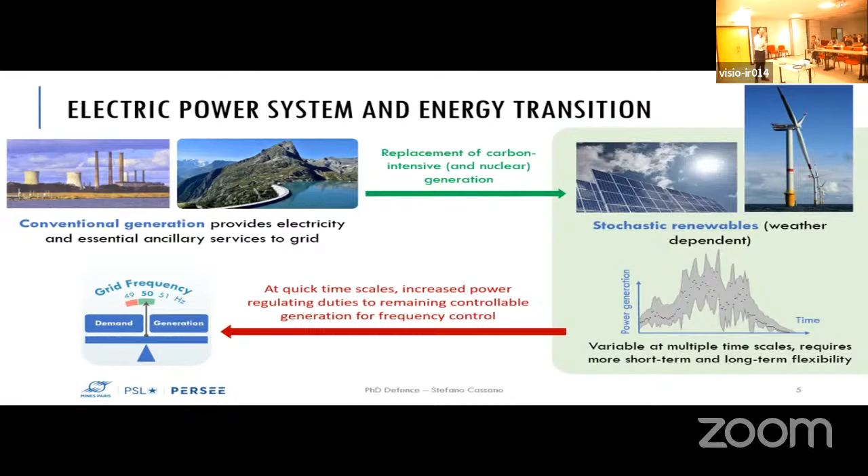Now, what is the role of hydropower in this context? Hydropower is a form of renewable conventional generation, the largest source of renewable electricity worldwide, and in many countries it represents critical infrastructure for electricity generation. Hydropower plants are dispatchable in the short term. They provide fast regulating power to the grid and fast startup times thanks to the lack of thermal constraints. In some configurations they can also implement energy storage, such as in the case of pump storage hydropower plants.

Given that hydropower, together with nuclear, will be the only form of conventional generation, future requirements of increased regulation duties, such as larger ramping rates, more frequent start and stop sequences, and enhanced frequency regulation, may lead to an increasing level of fatigue on mechanical components, and in the worst case scenarios, may lead to failures.

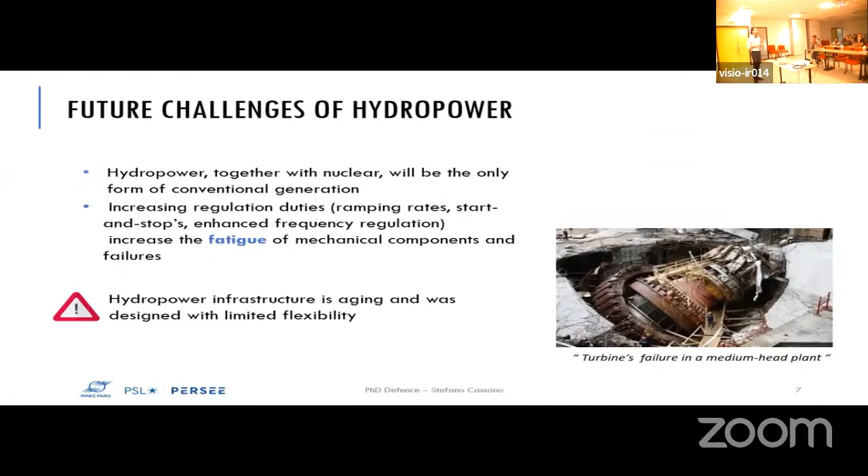Another problem is that since most of the plants were built between the 50s and the 80s, the hydropower plant infrastructure is aging and was designed with limited flexibility. So there's a need for a novel technical solution to assure reliable operation of these plants.

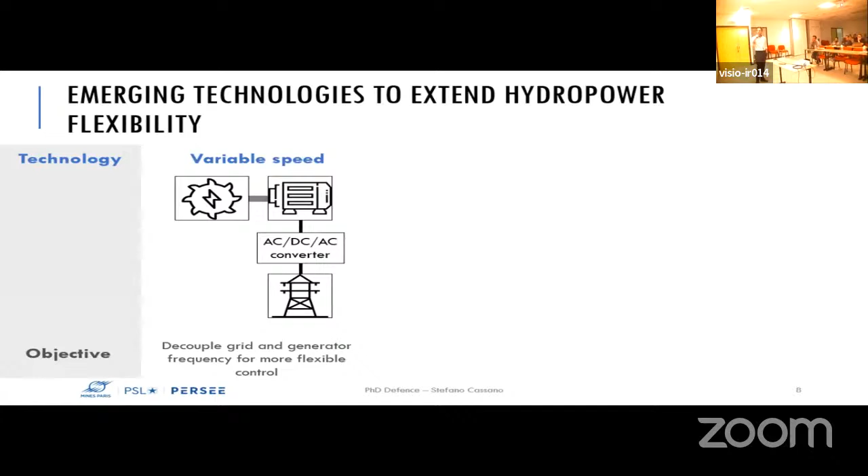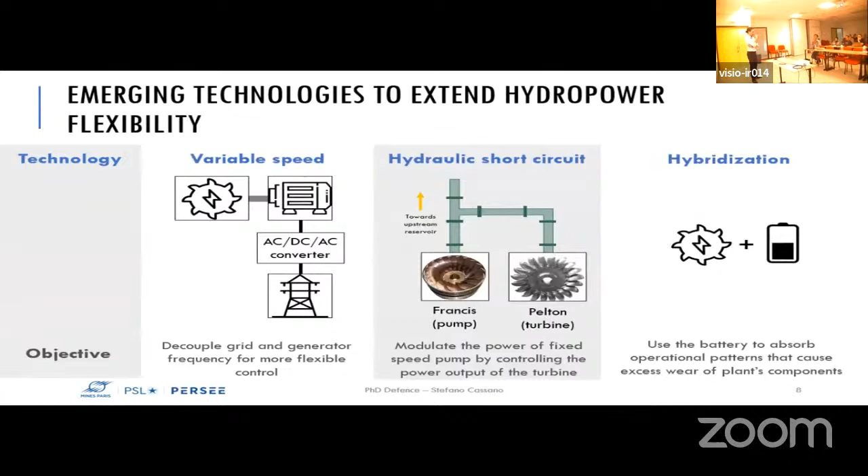In this slide, I'm going to show the most promising technologies to extend hydropower plant flexibility. The first is variable speed technology, which consists in decoupling the grid and generator frequency for more flexible control. Another technology is the hydraulic short circuit, a technique used in pump storage hydropower plants to modulate the power of the pump by acting on the output power of the turbine. And then we have hybridization, which is the technology we will tackle today.

Now let's move to the objective of this PhD thesis. We focus on hybrid hydropower plants. A hybrid hydropower plant is a conventional plant augmented with a battery energy storage system connected in parallel to the electric machine.

The advantages of hybridization are first to reduce the regulation duties for the hydropower plant because the battery is injecting the power, and second, to increase the regulation capability thanks to the quicker ramping rates of the battery. So the question we want to answer is, how do we control a hybrid plant?

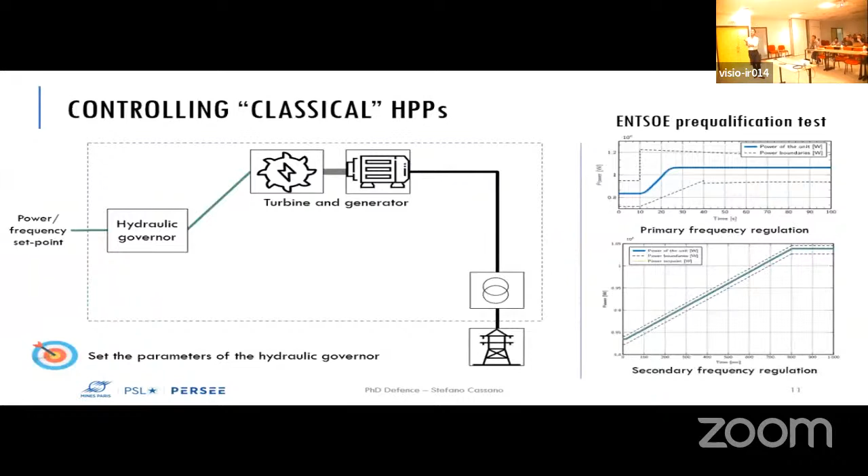This is a classical hydropower plant which is controlled with a hydraulic governor that takes as input a power or frequency set point, and it determines a guide vane opening to the turbine. In this configuration, we know how to deal with the control problem because what we have to do is to

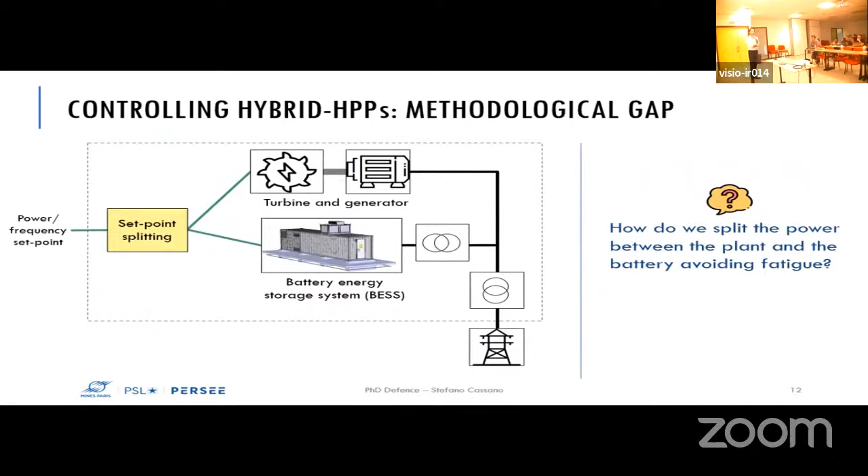set the parameters of the hydraulic governor in order to comply with the primary and secondary frequency regulation requirements. Then we hybridize, and we have two sources that are different in nature. So the question becomes, how do we split the power between the plant and the battery while avoiding fatigue? So this is what we call the set point splitting problem, a relatively new research problem that so far has been addressed in the literature with empirical models.

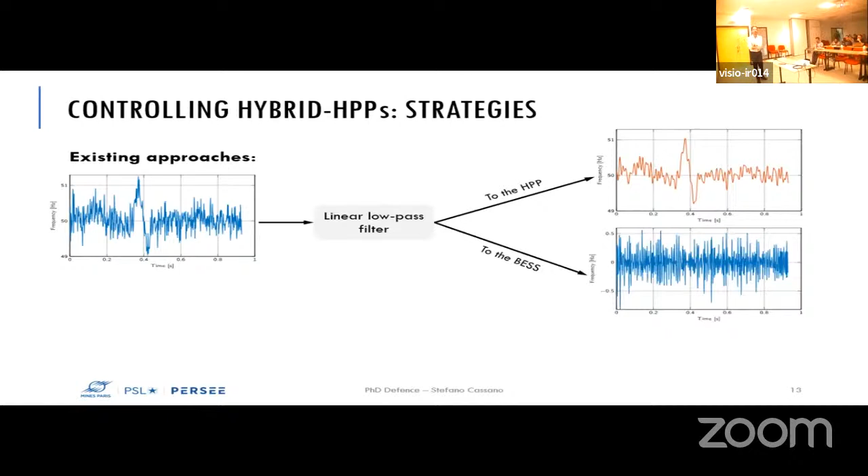One existing approach is to apply a linear low-pass filter to the input frequency and then to give the filtered signal to the hydropower plant and the higher variation of frequency to the battery. The advantage of doing that is that it's simple to implement. Linear low-pass filters are simple to implement. However, they are completely uninformed of fatigue issue, and therefore they can lead to suboptimal use of the battery.

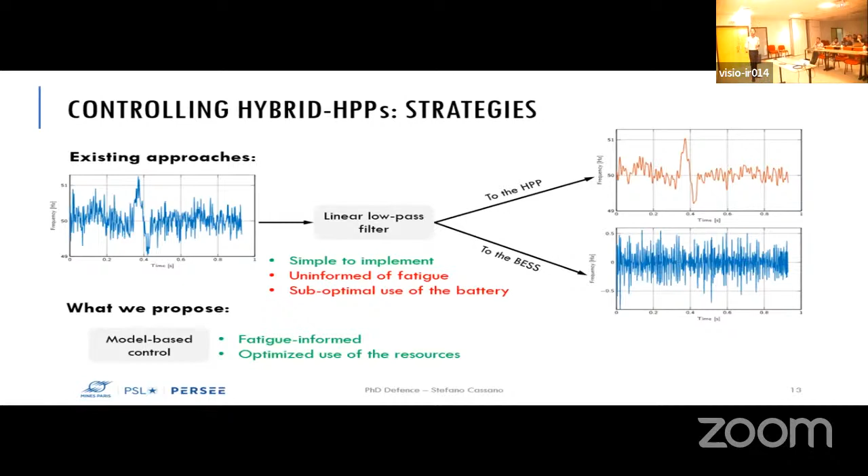As a major contribution of this work, what we propose instead is a model-based control that is fatigue-informed and allows optimal use of both the plant and the battery. Therefore, the primary objective of this thesis is to develop a set point splitting strategy with guaranteed performance on fatigue reduction. Then we have a battery, so we know that at a certain point we have to recharge it, and therefore the second objective is to design a scheduler for managing the battery energy.

Now let's enter the central part of the presentation about the real-time controller for fatigue reduction. So in this work, we focus on fatigue issues on penstocks in medium and high-head hydropower plants.

In particular, penstocks are pressurized conduits that deliver the water from an upstream reservoir to the turbine. The reason why we look at this particular component is because recent research has shown that the hydraulic transient due to enhanced primary and secondary frequency regulation can increase the damage on this component by 10 times compared to the case where no ancillary services are provided.

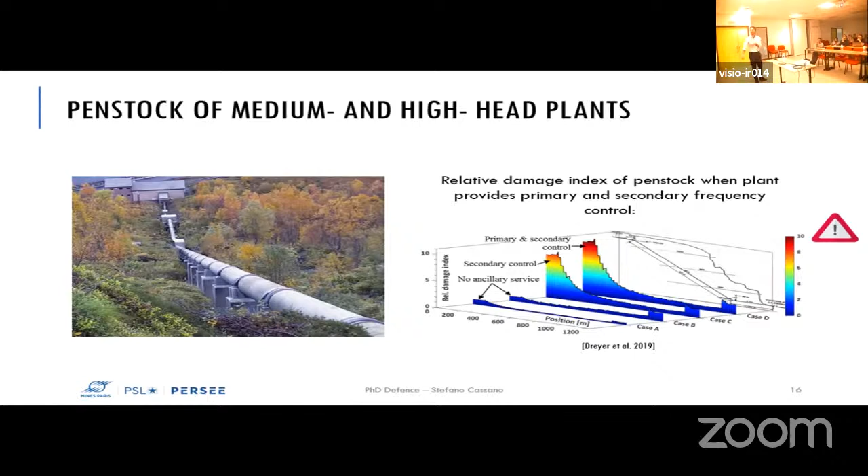So hydraulic transients due to regulation are well-known phenomena that I'm going to quickly explain with the following experiment we made. So we reproduce the penstock, which is connected to an upstream reservoir, and then we implement a valve representing the guide vane opening.

Before the valve, we install a relative pressure sensor to compute the head, which is given by the sum of two contributions. We have Z that represents the elevation head, which is the elevation above the datum, and then we have the pressure head, which is expressed by the pressure measured by the instrument divided by the water density and the acceleration of gravity.

Now, the experiment consists in fully closing the valve from a fully open condition. So let's see what happened with a short animation.

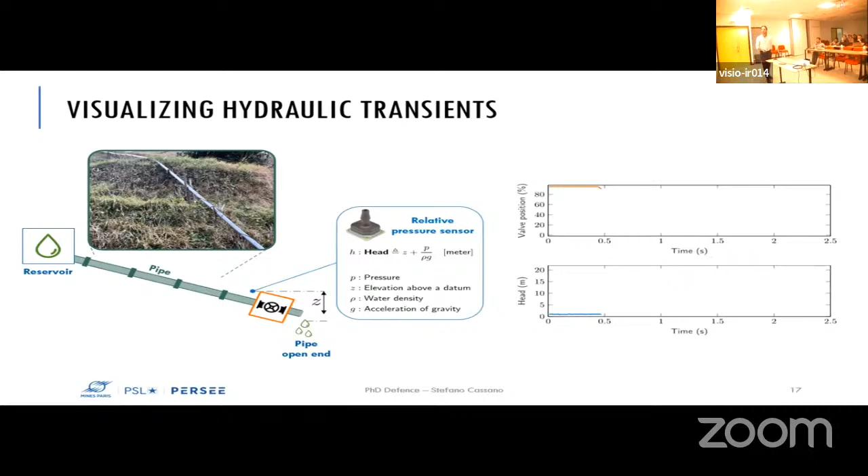So at the beginning, the valve is open and the head is close to the atmospheric pressure. Then we start closing the valve and the pressure rises up to a maximum value. Then the valve is closed and we observe a reflected wave that propagates through the penstock at the given time period, which is given by 2 times the pipe length over the wave speed.

This reflection dissipates due to friction until reaching a steady state condition where the head now is equal to the static pressure of the water column. This phenomenon is known as water hammer, and it appears for rapid variation of the guide vane opening.

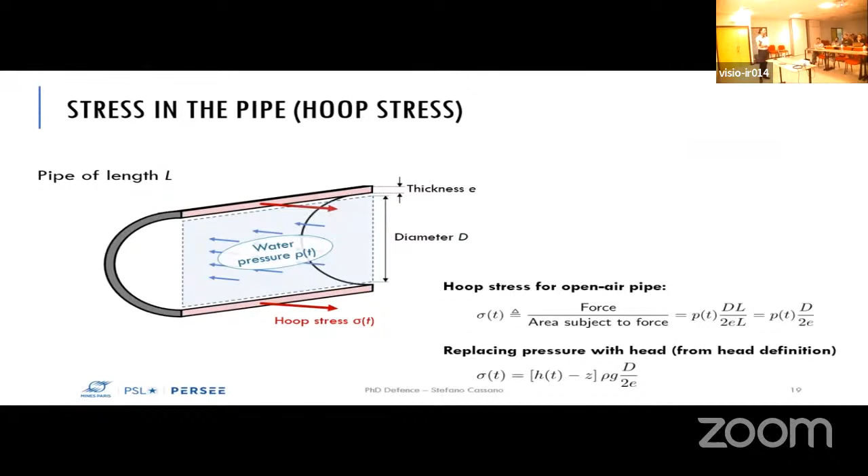Now, to go from the stress history to the service life of the component, let's consider the following stress signal, where we can identify the cycle amplitude delta sigma.

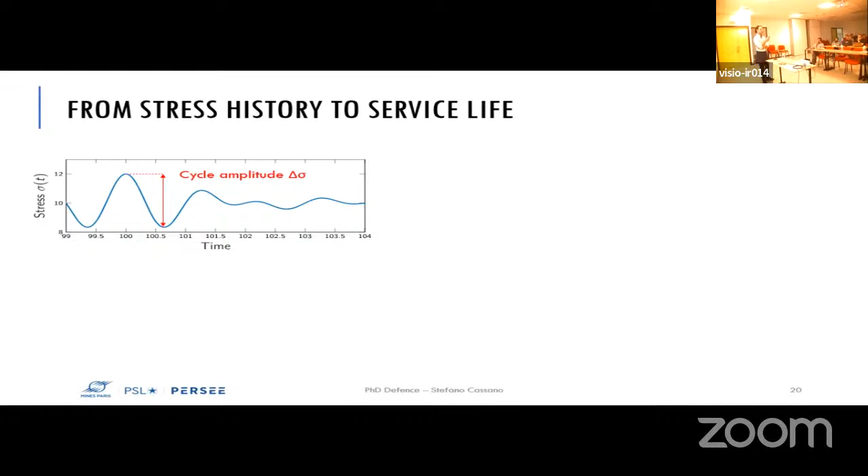A curious and interesting fact is that for ferrous material such as penstock, there exists a value called the fatigue limit, below which fatigue won't virtually impact the residual life of the component. So the intuition behind the formulation of a fatigue-informed controller was: can we design a controller that ensures the penstock stress stays below this fatigue limit?

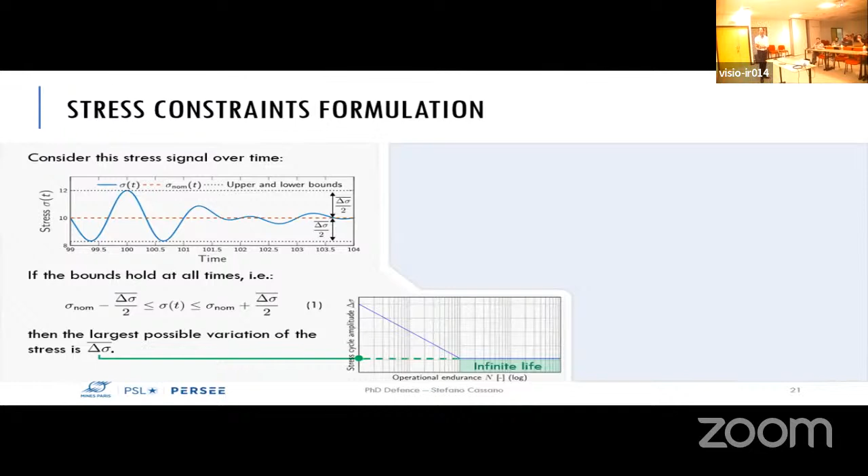To formulate the stress constraint, we consider again the stress signal over time, where we impose the following bounds. We obtain that the largest possible variation of the stress is given by delta sigma bar. If we set delta sigma bar equal to the fatigue limit of the SN curve, then we can possibly avoid fatigue.

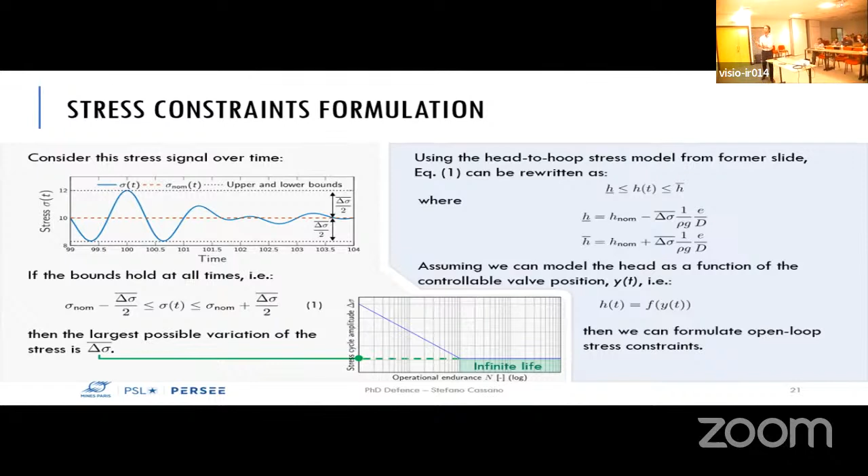Now, we can rewrite equation 1 using the head-to-hoop stress model from the former slide, and then we identify the upper and lower bounds in terms of head. Assuming that we can model the head as a function of the controllable valve position, we can formulate an open loop stress constraint. Therefore, the question is now, how do we model this head?

The behavior of the water within the pipe can be described by means of the conservation law of mass and momentum. Assuming a one-dimensional approach, this can be represented by the following set of partial differential equations that relate the state variables in terms of head and volumetric flow rate with the geometrical parameters of the pipe and some constants.

Now, the set of partial differential equations are converted into a set of ordinary differential equations by discretizing the pipe into a finite number of elements.

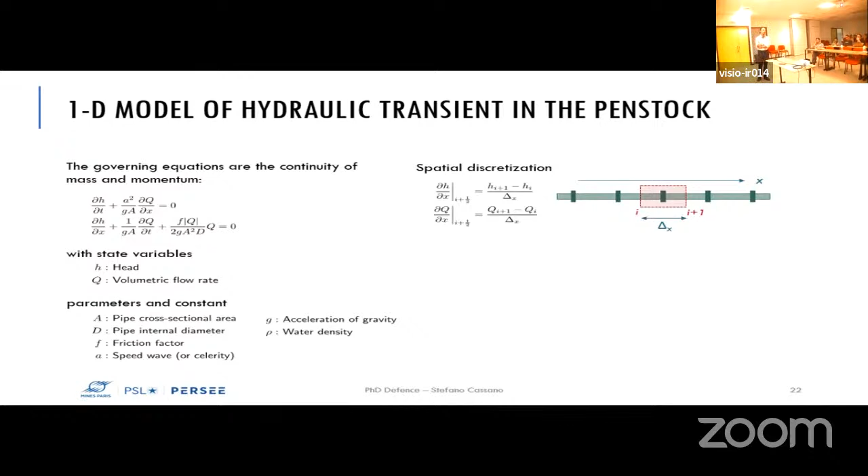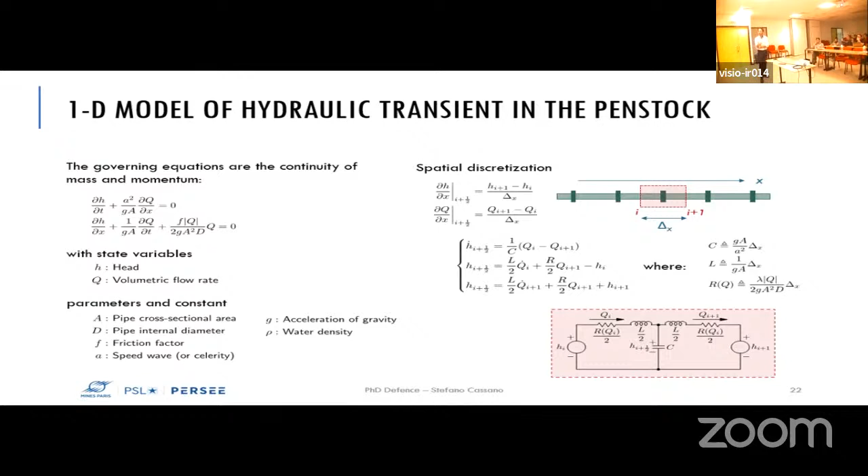The equivalent circuit model of the complete plant can then be obtained by combining the penstock model, the turbine model, and reservoirs. In particular, the reservoirs are modeled as a constant voltage source.

Then the penstock is modeled with a series of RLC branches, where each branch corresponds to a segment of the penstock. The turbine is modeled as an equivalent inductance accounting for the inertia effect of the water, and by a variable voltage source whose value is directly derived from the characteristic curve of the turbine that captures the relation between the state variables of the hydraulic machine.

For example, in the case of a Francis turbine, the state variables are the specific energy, the torque, the rotational speed, the flow, and the guide vane opening.

Now, these models are nonlinear. The first nonlinearity arises from the dependency of the hydraulic resistance on the volumetric flow, and the second stems from the nonlinear behavior of the characteristic curves of the turbine.

So we seek to linearize this model. First, we assume small variation of the flow, and therefore the hydraulic resistance can be considered as constant. Second, we approximate the characteristic curve of the turbine by using a first-order Taylor expansion.

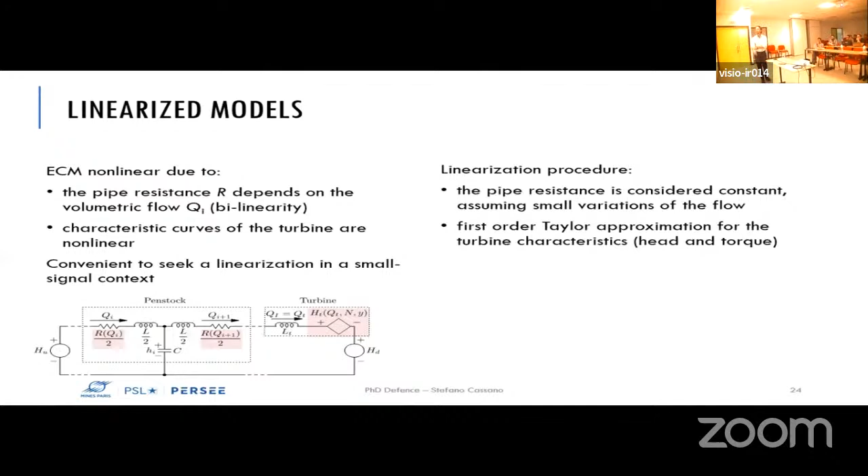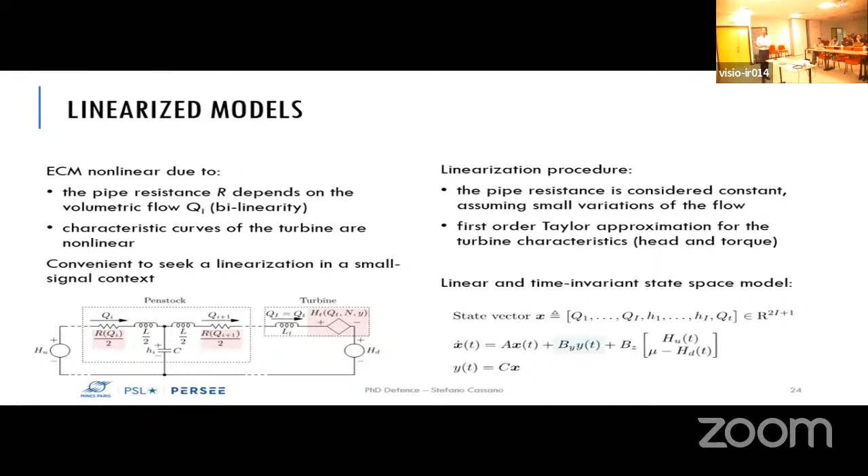Now, what is the accuracy of this model? We perform time domain simulation, and we evaluate the error as the difference between the linear estimates and the output from the nonlinear model.

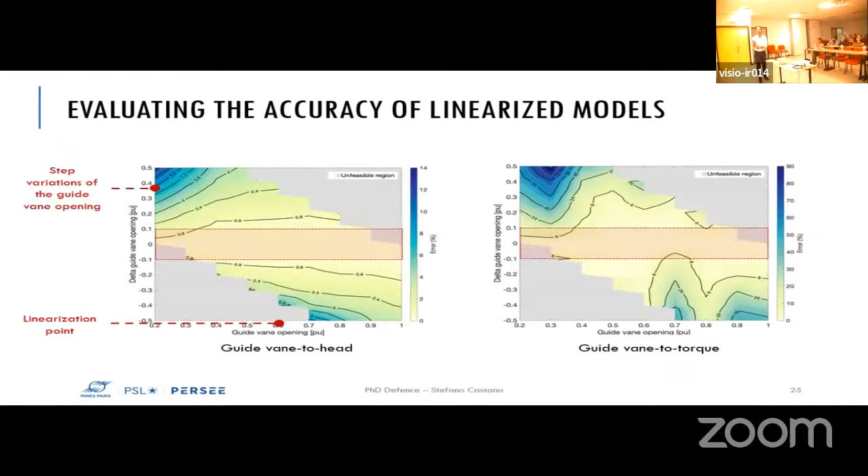This slide shows the result for the guide vane to head and the guide vane to torque linear models. The major outcome here is that for small variation of the guide vane opening around the linearization point, the error seems acceptable. Therefore, this suggests the use of linear models in small signal applications.

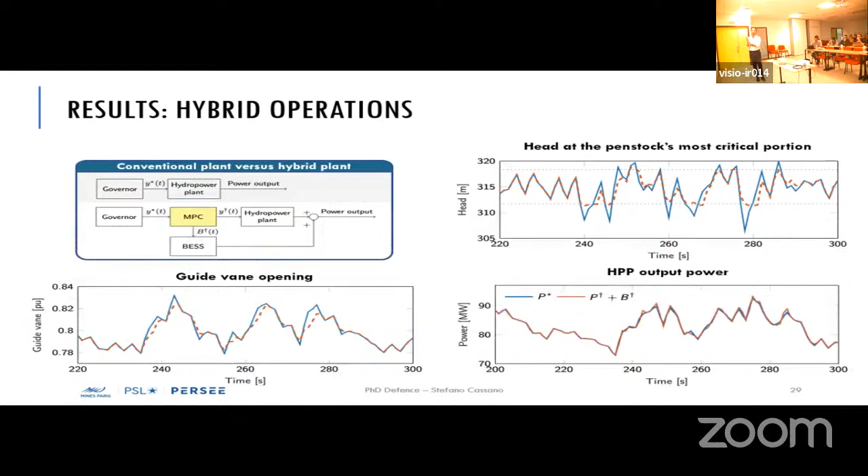In this slide, I show the results of the hybrid hydropower plant against its conventional counterpart. Regarding the output power, we see that the red line, which is the output power of the hybrid plant, closely tracks the blue line, which is the reference power. So we can conclude that the requirement of controlling the battery to achieve the same regulation duties as the original plant is fulfilled.

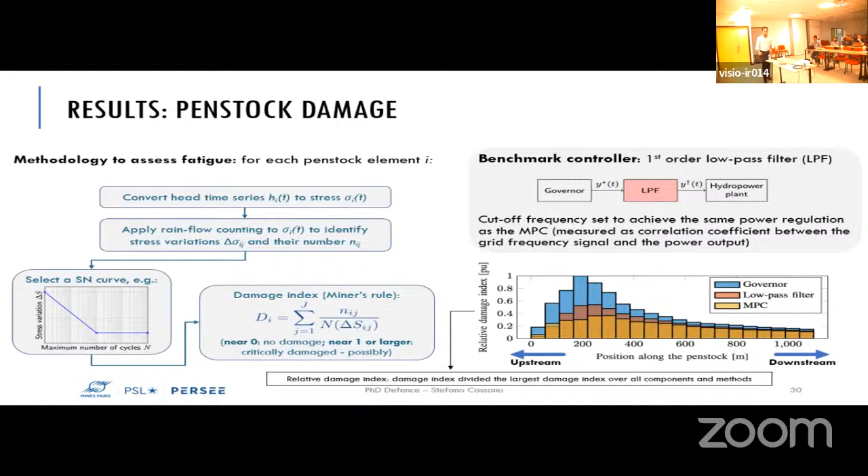Now, the second contribution of this work deals with scheduling the battery's operation. So far, we have considered the problem of how to split the power between the battery and the hydropower plant to reduce the fatigue in the penstock.

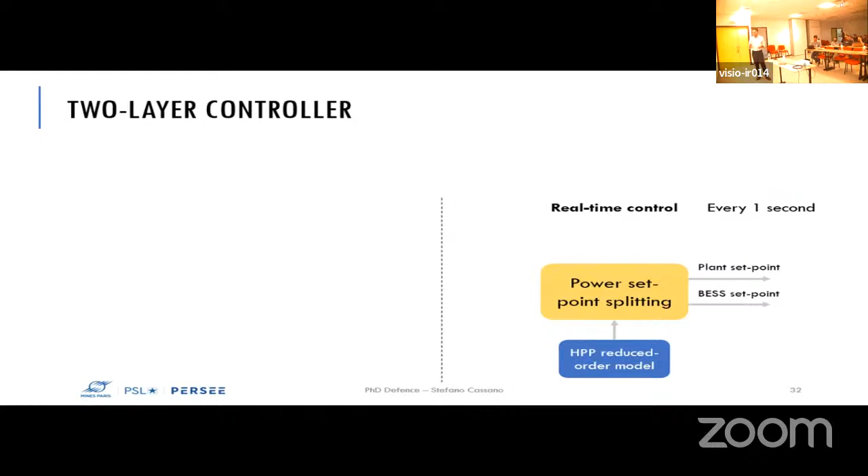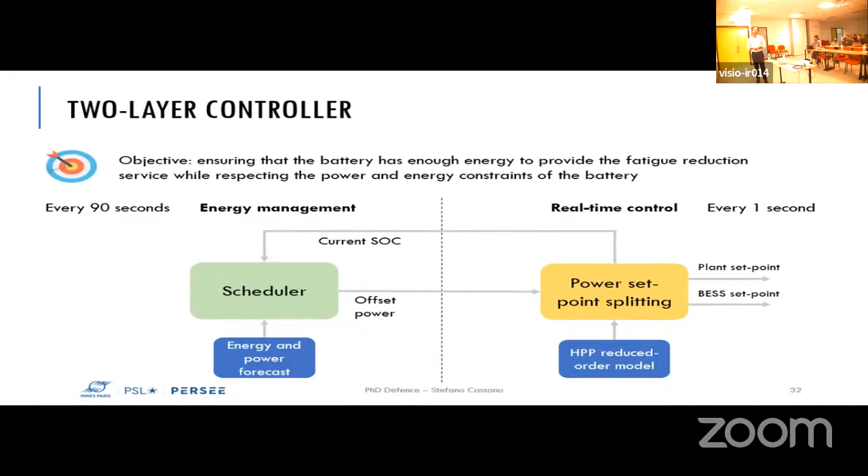Now we focus on the energy management of the battery. In particular, we want to formulate a scheduler that reads the current state of charge of the battery, and then, based on energy and power forecast of the service to provide, determines an offset power to either charge or discharge the battery. The objective is to ensure that the battery has enough energy to provide the fatigue reduction service while respecting the power and energy constraints of the battery.

In this slide, I will show the classical formulation of the scheduling problem. We start by saying that the battery injection is given by two contributions. The first represents the service we want to provide, given in terms of power forecast. Then we have F, the offset power responsible for charging or discharging the battery. The classical scheduling problem seeks to minimize this offset power over a scheduling horizon such that the power and energy constraints of the battery are respected.

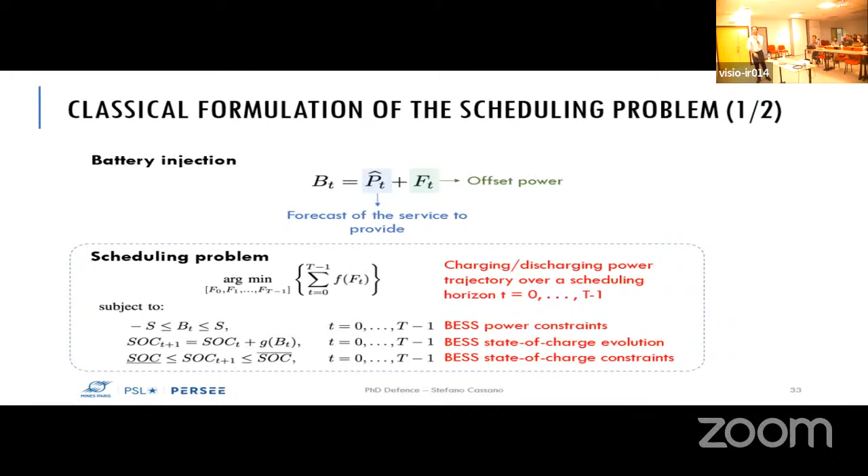Now, the problem with this formulation is that it considers static power constraints. These are an approximation of the true physical constraint of the battery under the assumption that the voltage is constant. However, in reality, the voltage of the battery is not constant, and the true physical constraints are actually the voltage and the current.

Therefore, the classical formulation may lead to unfeasible schedules, especially in power-intensive applications, like in the case of fatigue reduction service. So to show how this scheduler may fail, I will discuss the following example.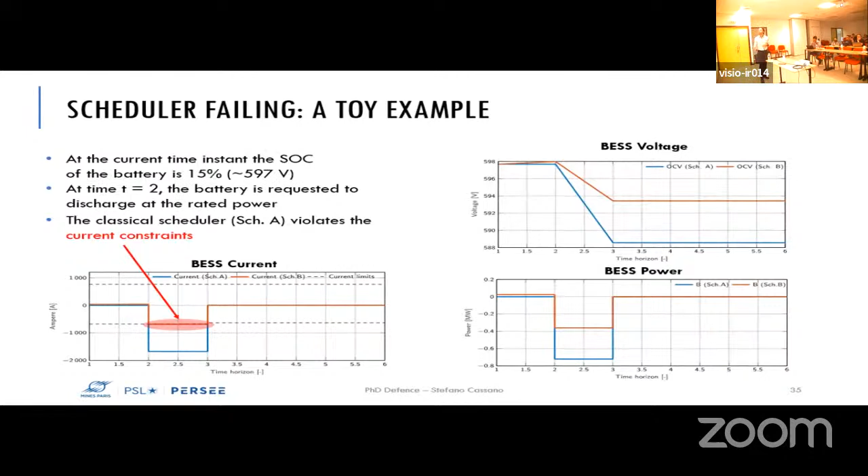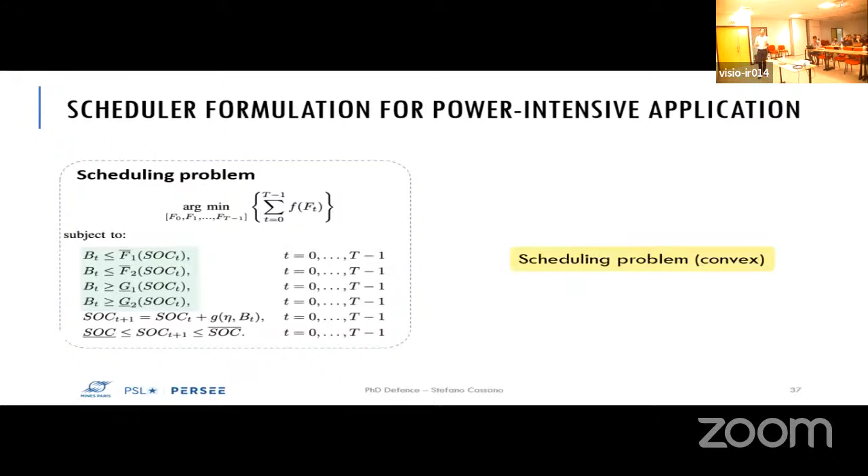Now, an interesting outcome is that this envelope is convex, so we can rewrite the bounds as 4 segments that are linear functions of the state of charge, and then include them in the scheduling problem as linear constraints, therefore obtaining a convex formulation of the scheduling problem.

Before, I said that the service to provide enters the problem in terms of forecast. So for the fatigue reduction service, the forecast of the energy and power by the battery is given by the contribution from primary and secondary frequency control.

Now, since these quantities are difficult to forecast because they are related to frequency deviation, what we propose is to replace them with estimates of upper and lower bounds.

So to find these estimates, the first step is to compute the battery power and energy contribution. For example, in the case of primary frequency control, we take historical frequency data and apply the same problem formulation as the real-time controller, but this time we simplify the model by neglecting the dynamics, and replace the MPC with a rate limiter on the frequency to decrease the computational time.

Then the energy is computed by integrating this power over a suitable time interval, and the process is repeated for the secondary frequency control. The second step is to evaluate the distribution of the estimates and then determine the prediction intervals by selecting symmetrical quantiles.

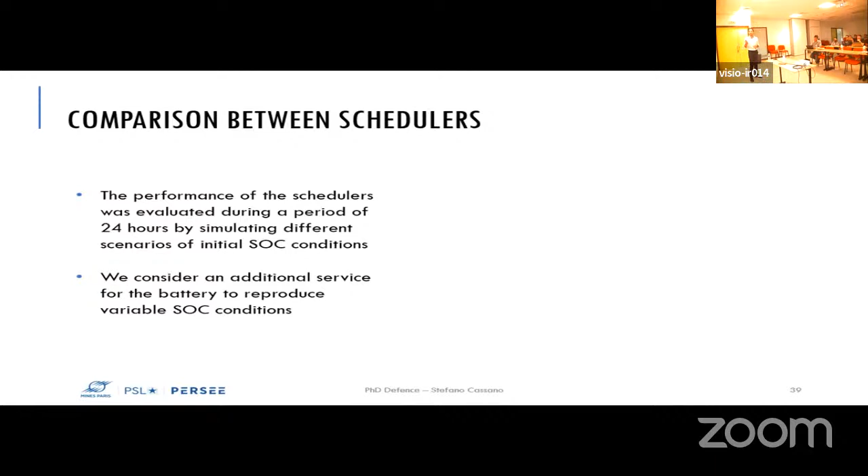At time t equals 0, the scheduling problem is solved for a given scheduling horizon. Then the first element is taken and given to the MPC, which at each second computes the guide vane opening for the plant and adjusts the battery set point. After 90 seconds, the scheduling problem is solved again with updated information.

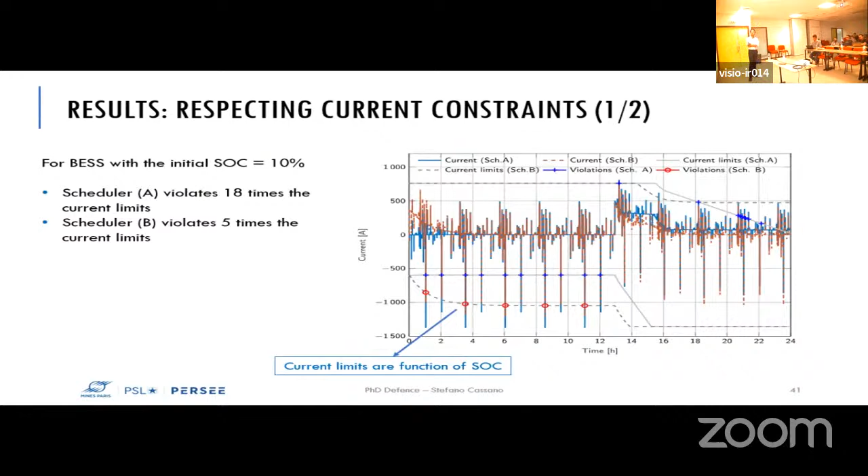The results show that for a battery with an initial state of charge of 10%, scheduler A violates the current limits 18 times and scheduler B violates them 5 times. For different initial state of charge conditions, we can draw similar conclusions. In particular, scheduler B achieves a greater reduction in the number of violations of the current limits, and also a lower average difference between the current and the bounds, with a lower variance.

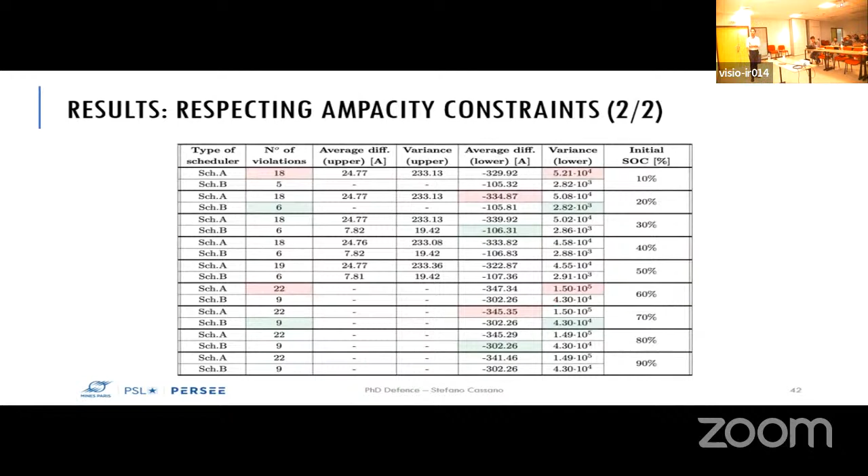Now let's draw some conclusions and future perspectives. We started this presentation with two questions. The first was, how do we deal with the set point splitting problem? The contribution here was to formulate a fatigue-aware control for hybrid hydropower plants through model predictive control. We derived a reduced order model of the plant to develop linear control strategies based on convex optimization, and we demonstrate that this model provides good accuracy for the head and torque estimates around their linearization point.

We propose a convex formulation of the optimization problem that was solved in terms of tens of milliseconds, therefore enabling real-time control implementation. The controller shows guaranteed performance in fatigue reduction on the penstock. Compared to the low-pass filter, it achieved a damage reduction of 40% on the most critical component of the penstock. Finally, the hybrid hydropower plant achieved the same regulation capability as the conventional plant.

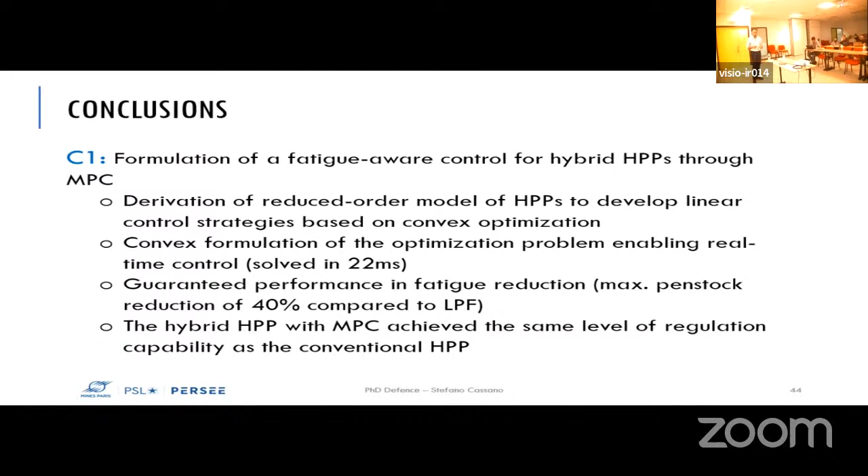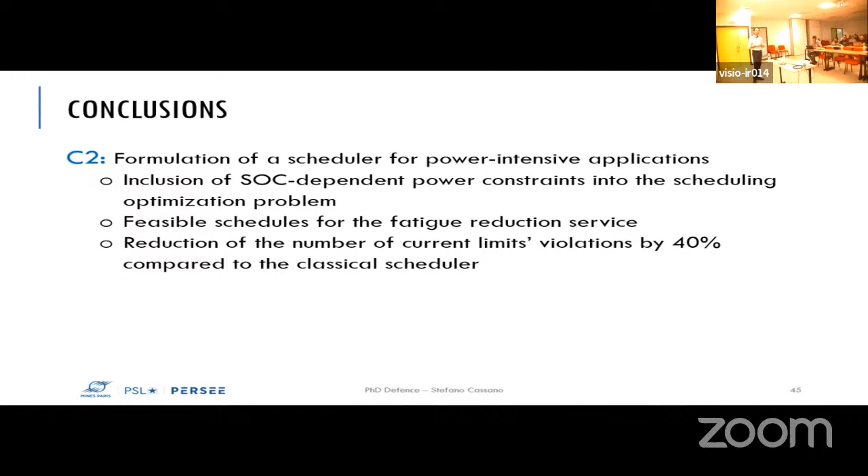The second question was how to manage the energy of the battery. The contribution here was to formulate a scheduler for power-intensive applications, and then include state of charge dependent power constraints into the scheduling optimization problem. We demonstrate feasible schedules for the fatigue reduction service and a reduction of the number of current limit violations by 40% compared to the classical scheduler.

Now for the future perspectives. One avenue that would be interesting to explore concerns fatigue modeling on the mechanical component. In our study, we modeled fatigue by leveraging the stress life method, but there exist many methods to assess fatigue that would be interesting to test. In general, fatigue modeling is a very complex problem, but in recent years there has been development of new models such as machine learning, data-driven modeling, or multi-scale models. I believe that considering different types of approaches would be interesting to better prevent and assess fatigue on the components.

Then another track concerns the battery modeling.

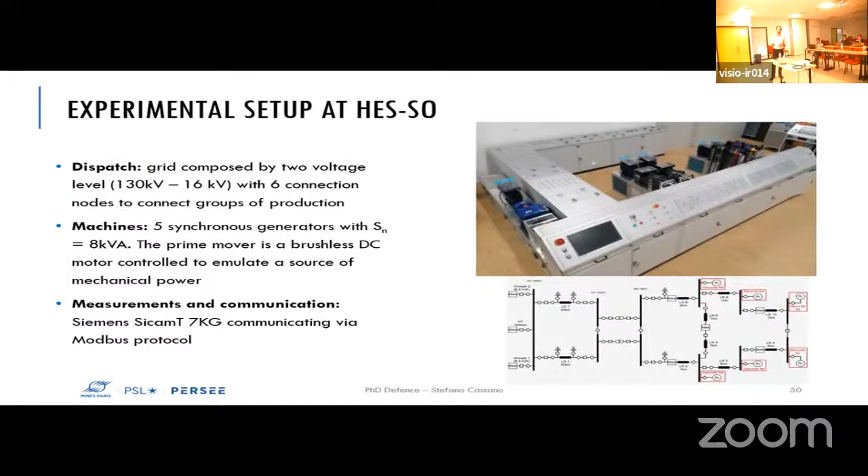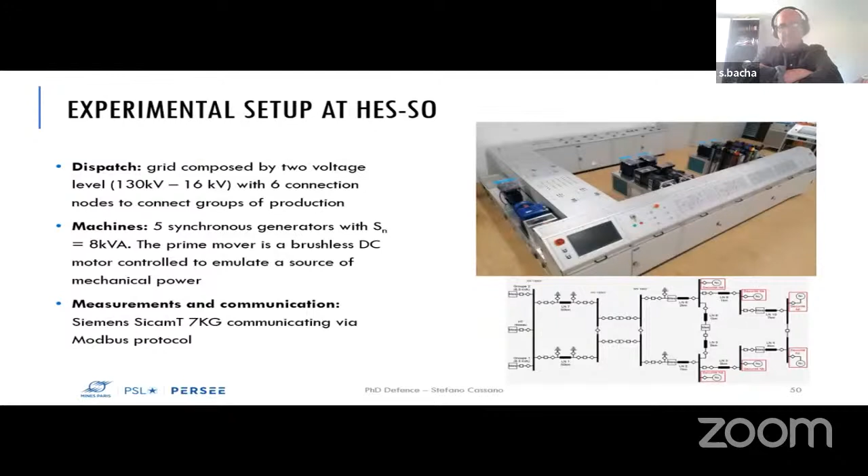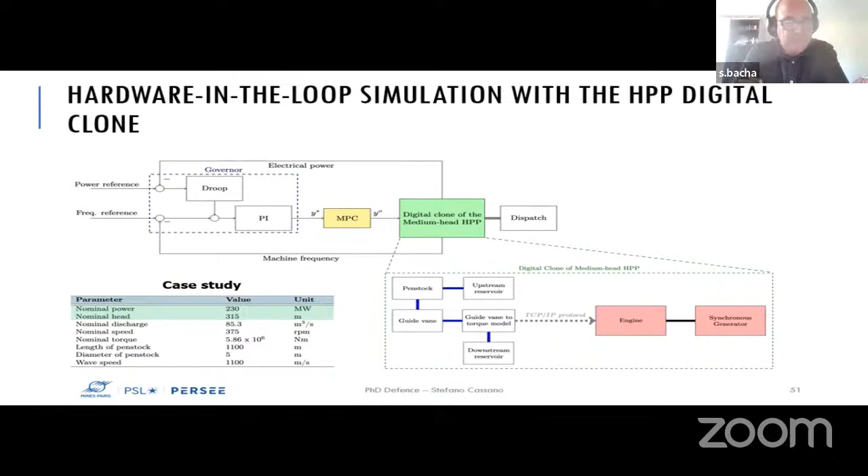We have the dispatch, which is a grid composed of 2 voltage levels with 6 connection nodes to connect groups of production. Then we have 5 synchronous generators with a rated power of 8 kilovolt-ampere, moved by a brushless DC motor that emulates the hydraulic turbine. For measurement we use the SicamT and communicate via Modbus protocol. For the hardware-in-the-loop simulation, we made a digital clone of the plant, basically what we did in the thesis, but then we made a Simulink model run with a real-time simulator, RTLab, which communicated with the physical equipment, the motor and the electrical generator.

The case study is the same as in the thesis, and I can show you some results concerning the performance of the MPC, which was actually run in real time. That was really interesting, because we also have the experimental validation. Oh no, what happened? It's gone. It's gone, yes.

Okay, just a second. This is a real-time presentation, of course. Real-time. Okay. So now I see my face. I think. Thank you. Thank you.

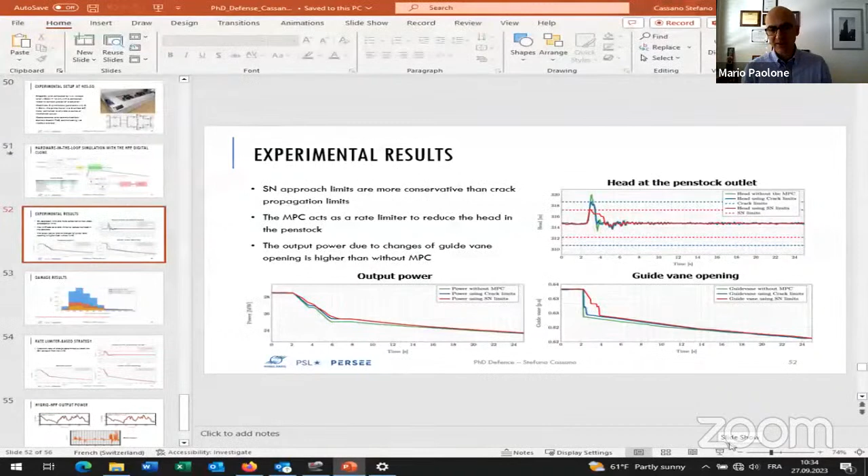Now, what we do in the electromagnetic world is to say, okay, we use the Bergeron method—parenthesis, Bergeron was a hydraulic engineer, not an electric engineer—to analytically solve the wave propagation, and then we add lumped losses like lumped components. And these lumped losses can be nonlinear too. In the case of the electromagnetic world, these nonlinear losses are essentially due to the Carson impedance, so essentially the impedance of the ground.

Now, can you tell me why you opted for solving the wave propagation equations using a set of finite differences? Because this is like using a bazooka to solve a problem that can be solved analytically in a much easier fashion. Can you elaborate on your choice?

Okay. I'm not saying it's wrong. What you did is numerically and computationally correct. There are no mistakes there. It's just that you're using a very complex tool to solve a problem that can be solved easily.

Yeah. But the choice of the equivalent circuit model for me was done because, first of all, I'm an electrical engineer, and so I wanted to have the same formalism as the electrical circuit, also enabling the implementation of the characteristic curves in terms of voltage sources, for example. At the beginning, when I had to make my modeling choices, I saw that there were other methods, but in terms of representation, like representing them as a state space model, the electric circuit was, let's say, the one that provided good accuracy but also good formalism, I would say.

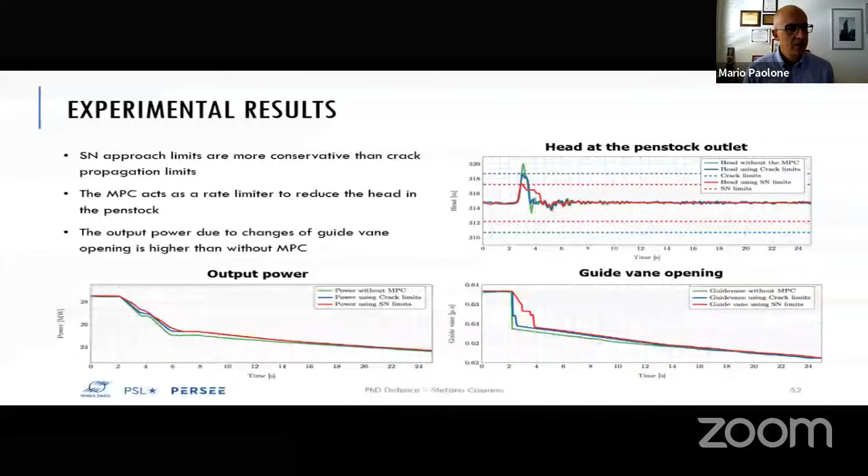Okay, thank you. Can we go to slide 34? Sure. Yeah, okay, so this is your scheduling problem. Essentially the constraints here refer to the state variable of the battery, which is its state of charge, and also to the power, which is more a static constraint.

Now, you may know that in reality the power constraint of the battery is a little bit more complicated than that, because the capability curve of the converter - which here you're assuming to be just a parameter - in reality can be a function of the AC and DC voltages of the converter. This means that your capital S is actually a constraint that is dependent on the state of the battery and the state of the grid. So in this case the problem can become more complicated and non-convex. What are your thoughts about this issue?

It's a practical issue. If you try to implement this in a real converter, you may have feasibility problems - essentially the converter trips because of this dependency of S with the AC and DC voltages. I'm telling you because we have this problem, we experience this problem in reality. Okay. Sorry, can you reformulate the question, because it was not so clear to me?

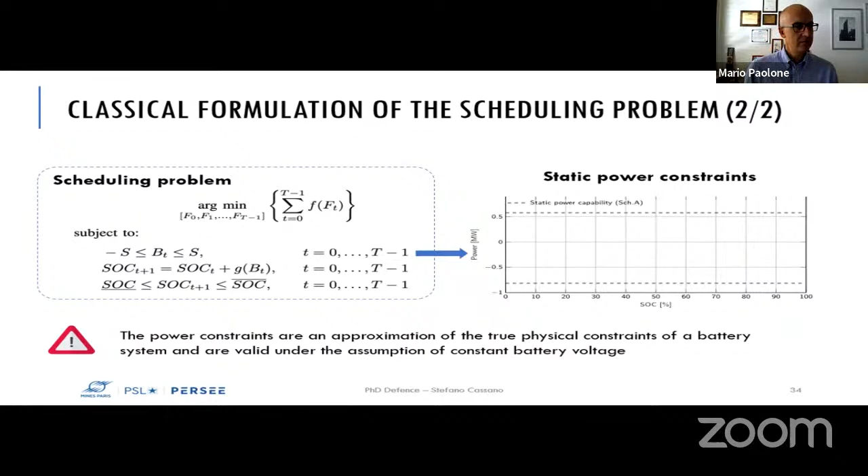Now, I like the whole development that you've done. It's very elegant, and I very much appreciated the way you implemented it. I have no doubt about it.

So this means you should add an RC circuit in parallel in series to the resistive model, which can still be treated in a way similar to what you did, like Fabrizio showed in one of his papers. Why didn't you do that? I was a bit surprised. Why did you choose this simple model?

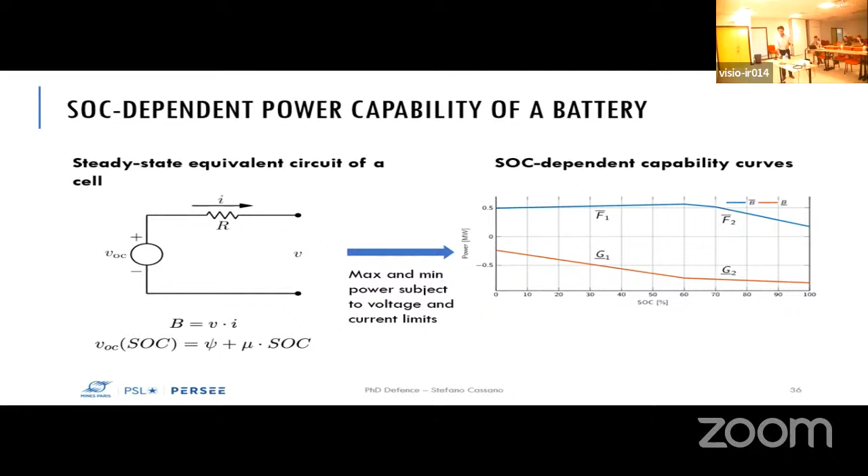Yeah, I mean, yes. So to size the battery, what I would do is evaluate the power and energy needs for this service, as I did a little bit. I estimate here the forecast, but I can also estimate the energy and power demands required for the battery for secondary and primary frequency regulation by using historical data or set points of secondary frequency regulation, and then I can size the battery based on that.

Okay, yeah. In any case, the optimization problem wouldn't change. Also, in my case I considered a battery that was not optimized for this service, and the problem was still the same.

Okay, that's very good, because eventually, if you want to sell your control to an operator of a hydropower plant, you have to sell also the sizing of the battery, because the guy will come to you and say, how big should this be? And you have to provide this answer.

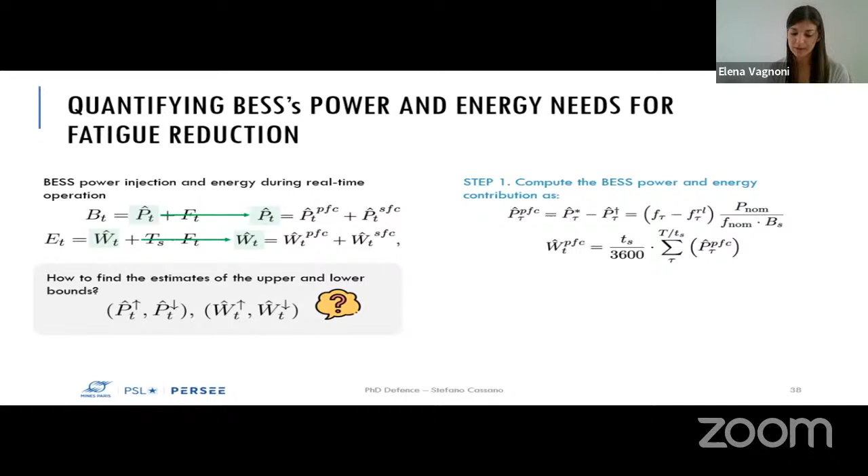So as Professor Paolone already anticipated, my background is more on mechanical engineering, so my questions will be more related to that part of your work, which is anyway very important for the field, and gives perspectives also from the hydraulic point of view of how to use those hydraulic machines and hydropower plants. So the first question I have is about the values of the stresses. In slide 20, you've shown the Wöhler curve, and in order to apply the rainflow counting algorithm, exactly, yeah.

I didn't really see an analysis going through those stress values, but I only appreciated that through the evaluation of the damage, which is the performance indicator you selected. However, since other methods do exist and the rainflow counting algorithm is normally considered a quite easy way to assess fatigue through a statistical approach, but generally not the most accurate one, knowing what stresses you'd actually reduce through your method would allow better understanding of the results achievable with this methodology, either with only the predictive control method, without a battery, and with a battery.

Can you tell me, in terms of stress cycle amplitudes, where we are in this diagram? I mean, can we really approach the infinite life? Are we already actually maybe in the infinite life for some cases?

In my case study, I also consider future requirements of flexibility, so hydraulic transients were much more important than normal cases. I just considered primary frequency regulation, so there are other services that perhaps can induce higher stress. In our case study, there were cycles that were above the fatigue limit, that's why we constrained under the fatigue limit.

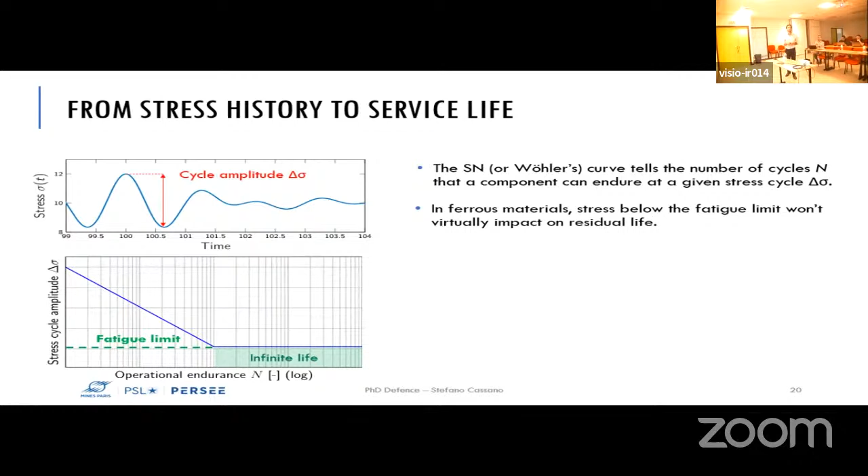But yeah, we had some cycles that were above the fatigue limit, not so high, but for primary frequency regulation at least. And my question leads to other things.

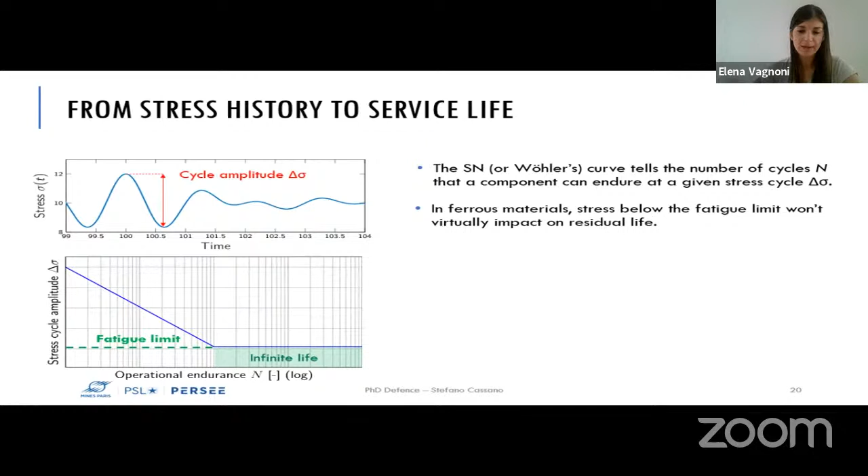Before, in the previous slide, you showed the phenomenon of water hammer that happens when you close the valve. And then the study you do is related to the guide vanes variation, which is not the same component, and of course is very different to the effect of changing the angle of the guide vanes on the head compared to this strong water hammer that happens, for instance, in an emergency shutdown or a sharp closing or opening of a valve.

So the other question would be, did you consider both effects? Did you consider both cycles related to the on and off of this valve, and the guide vanes opening variations, or did you only consider the guide vanes opening variation? And also, if you have an idea about the damage that both components' position variations would lead to.

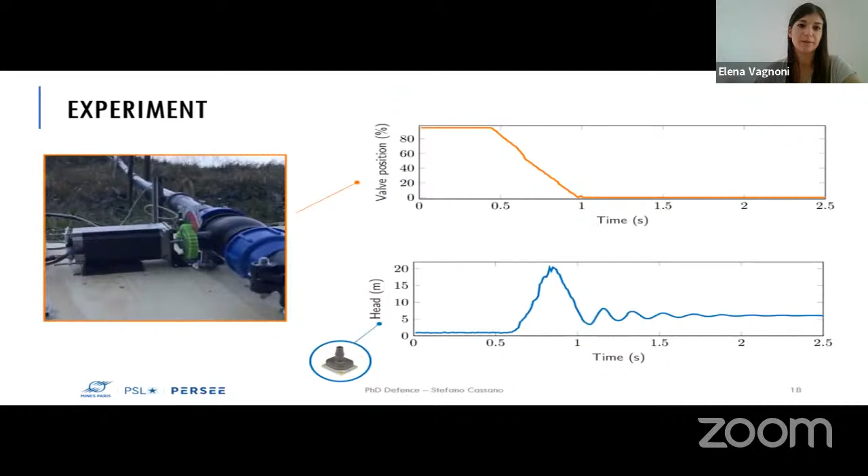I just consider guide vane variation. I didn't consider fully closing, fully opening conditions. But for what I understood, perhaps the fatigue is most critical during secondary frequency regulation, because there you have a really big step of power set point that may lead to larger opening of the guide vane. Then it's also true that usually the guide vane opening is already limited by the rate limiter of the plant, and also because of the servo motor dynamics.

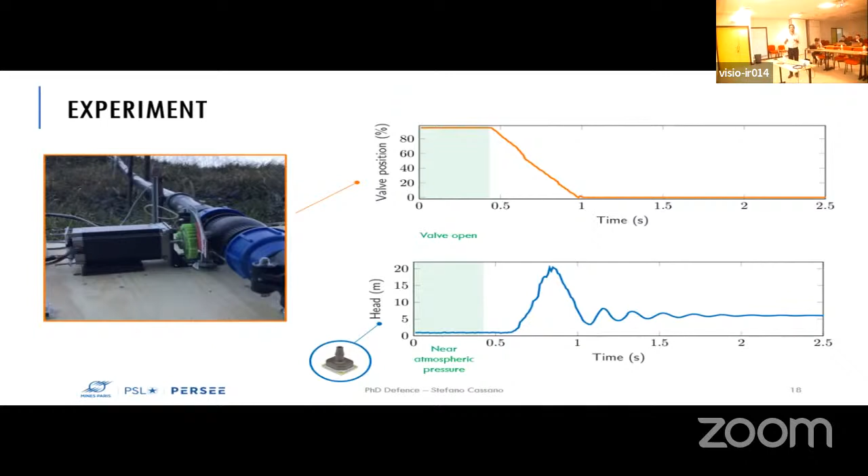But still, in some conditions, you can have stresses with the guide vane openings, even though the rate limiter of the plant is set to respect the static constraints of the limit. The limits were applied at the beginning when the plant was built. Then with new operations and more enhanced frequency regulation, we can also have stresses that are above these limits.

Okay, and thanks. And the other question that comes out from the previous question: as you mentioned, you do have a damage even with the MPC, at least that was the results you presented both in your thesis and during the presentation, which is clearly lower than if you don't have any fatigue-informed control, or if you have a simple filter with a dead band.

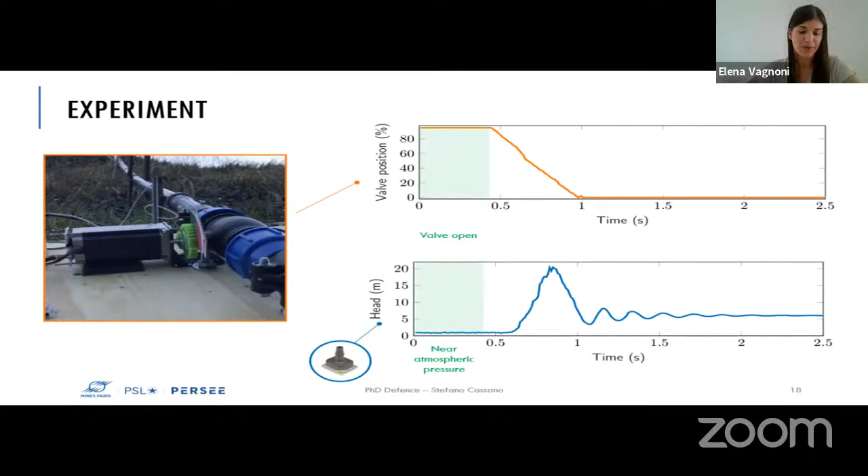So my question would have been, is the MPC failing to respect this infinite life condition on the sigma, or if not, then probabilities would be your answer. So for this I will ask more explanation. How did you consider the second slope? What was the criteria for you to choose, instead of having a horizontal line with the Wöhler curve, a different slope of the curve?

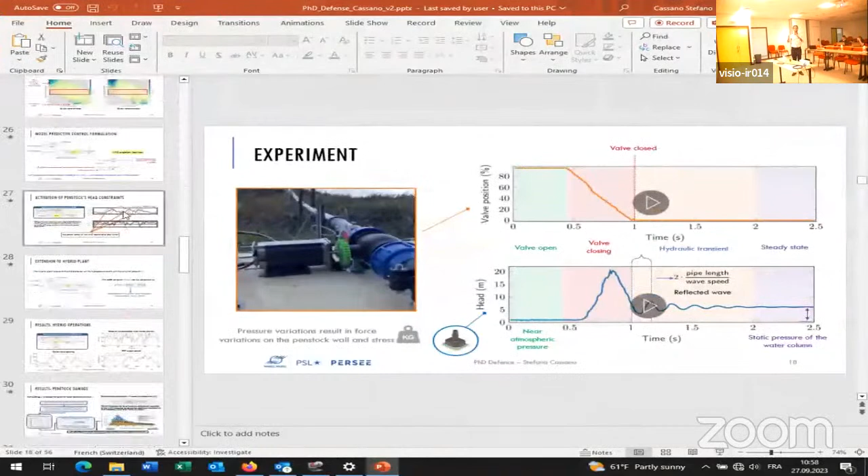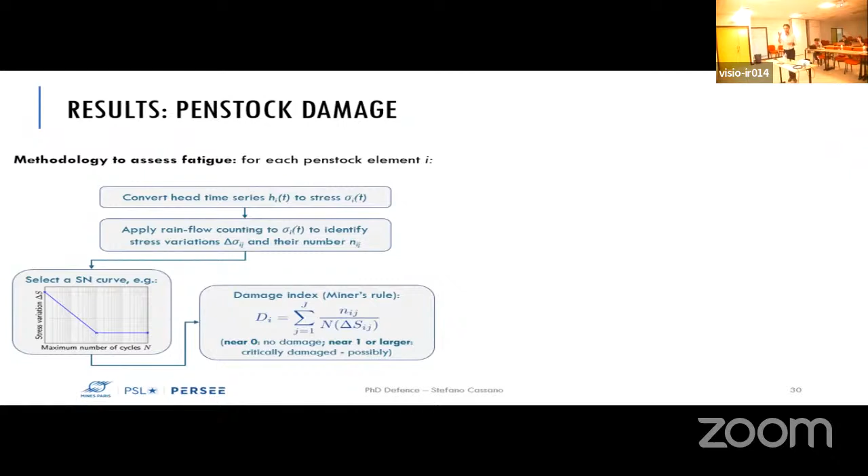So considering fatigue infinite cycles would be like a really weird case, I would say, because I think it's not really the case in reality, since these curves are not so detailed. Well, those are valid for specimens, of course. Then when we have imperfections through the material of the components, this is typically what industries assess, and that's why those are less accurate, because those are based on statistics.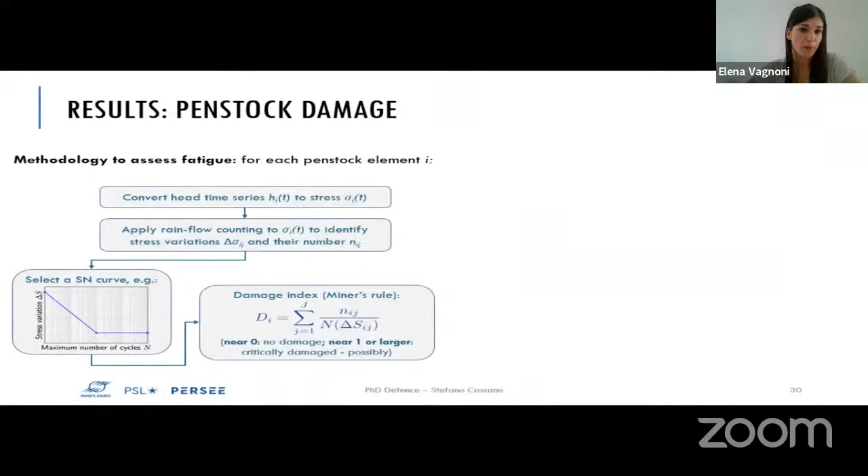Okay, so actually you didn't take this curve, but you took one with a slope. And is the MPC always successful? According to the definition, I would expect the MPC is able to keep the stress level lower than a given value, in the second slope, so has a lower rate of damage, if we can call it that way. Was the MPC successful in keeping this delta stress always below this set value?

No, and the reason is because of errors in the linear model. So sometimes it's not always accurate because of these small errors. But in general, what you can do is also consider a sort of slack in the constraints, so you can consider this effect in your constraints. But yeah, there are some errors due to the linear model, of course.

Thank you. And so my last question, you mentioned in your conclusive slide that other models could be used to predict the stress, and one could be, for instance, based on artificial intelligence and machine learning methods. I think one of the strengths of your work is how you define the stresses in a way that you can fully exploit it into an MPC model, because you have a clear model, not a black box method to assess this damage and the delta stresses, which is what is entering into your MPC. How would you do that with a machine learning method predicting the stresses?

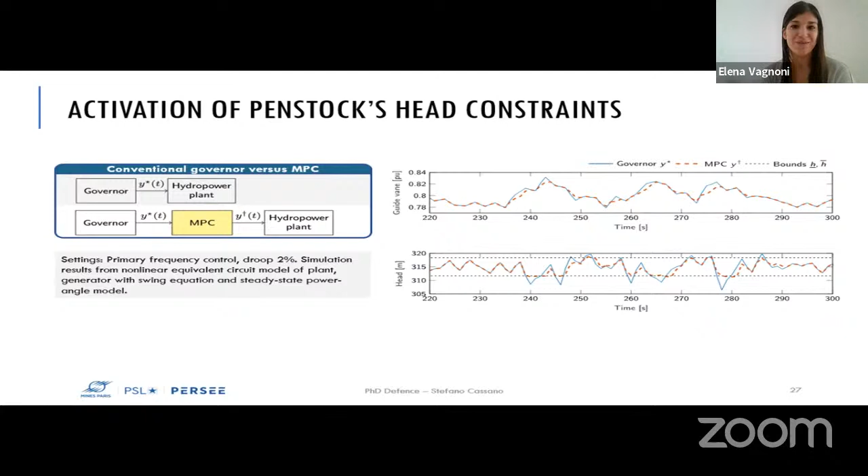Thank you, President. Thank you for your nice presentation, Stefano, and your two supervisors, Professor Georges and Fabrizio, for inviting me to your PhD defense. I'm very happy to have this seminar with other professors from our jury members, and also listen to your questions. They are all very good, and I have also learned a lot of new things. For the PhD work, I think this is a quite important topic. On one side, it is important work for enhancing regulation performance for power grids. But at the same time, for our hydropower plants and power sources, the fatigue problems and adverse influence are also quite important. So the coordination between power plants and the power grids is also a key idea of my work. I'm very happy to be here to give my comments and some of my questions.

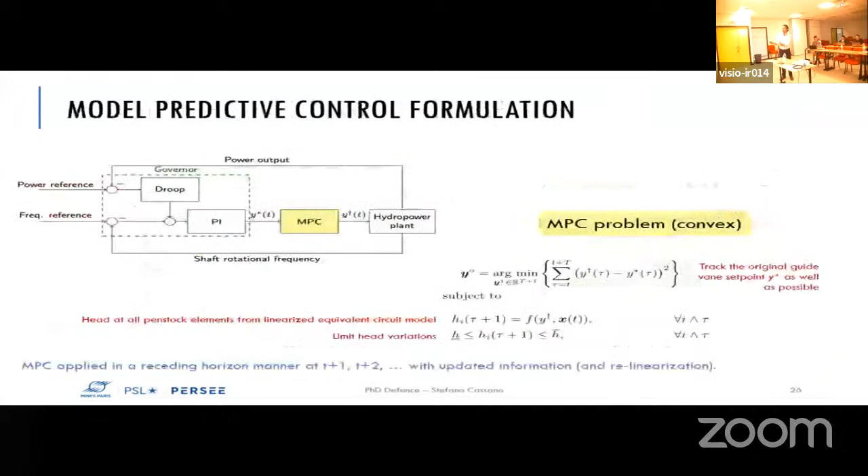Thank you very much for the question. Concerning the real life applicability, as I showed, we performed some hardware in the loop simulations where we saw that the performance of the penstock was good, so we were happy with that. About stability, we didn't perform any analysis. But something I think, and I think I explained, is that since the action of the MPC resembles a rate limiter, this is a good outcome for the stability of the controller, because the rate limiter action is stable by definition.

I don't know if I replied well, but the challenges for implementing the MPC in real time are that it's solved with real-time requirements. There are many things you can consider, like the prediction horizon, the accuracy of your models, and also the communication between the controller and the physical equipment. In our case, we achieved this real-time implementation. So yeah, I can tell that.

Previously I also had some studies on filters for hydropower plants to reduce wear and tear. As you said, the MPC acts like a rate limiter. Actually, it is also a non-linear factor, but I think it's somehow better than backlash or something. So the influence and the stability issue deserve some more studies. That's just my suggestion. Let's move on to my second question.

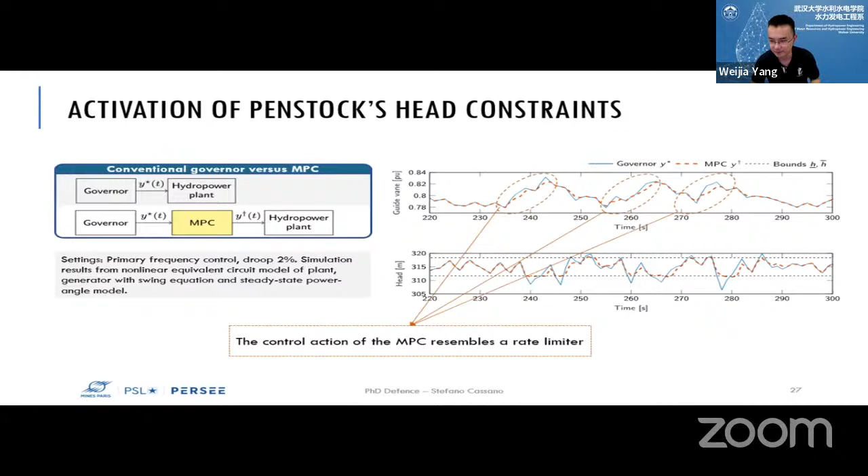The next question is regarding the working conditions of hydropower plants. For the new control method, how are the performances for primary frequency control and secondary frequency control under your control method, for example the MPC or adding a battery? Are there any differences in the different regulation performances?

You mean with the hybrid hydropower plant to compare with the conventional plant?

No, sorry. I mean in your thesis and presentation, the workload, the load cases, the working condition, I think it's mainly for secondary frequency control, right? You have just to change the power set point and follow the power to balance the wind and solar or something. I mean, if we regulate our hydropower units in primary frequency control mode or secondary frequency control mode, are there any differences? Under your control structure?

The main difference is that when we are considering primary frequency regulation, usually we work close to the linearization point of linear models because the set point of frequency doesn't vary too much. When we consider secondary frequency control, then we have to re-linearize the model because the change of set point leads to a different working condition of the plant. So we have to re-linearize the model, and we can do that by using lookup tables, for example. We don't actually have to compute the linear model in real time, but we can extract the data from these lookup tables.

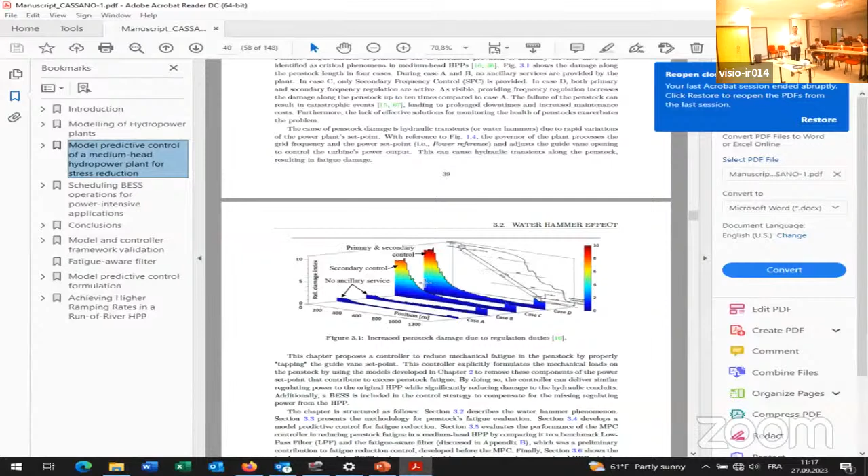Yeah, sure. The point is, for our study, it's like choosing the good SN curve, which by the way is an input of the problem, and this curve can be chosen based on the material, but also the conditions of the material, the temperature. So there are many factors to choose the appropriate curve, which is something that the expert should suggest, perhaps. And then another approach you can do is to really make some measurement, like non-destructive measurement on the components, to evaluate the cracks in the material, and then based on that you can also choose other curves that are more suitable. So perhaps you have to perform some measurements if you want something more detailed.

Okay, my last question is also an open question. I'm also very interested because I have heard some reported cases for hydropower plants adding battery, the hybrid solution, in Germany, in Sweden, and also in the company Andritz Hydro. Do you have any comments, or did you hear about this? Did you do some investigations, and how are your comments? Because I have read something from internet, yeah, they have also done this study.

Yeah, I did some investigation, and what I found was really preliminary work, I would say, evaluating how to split the power was the common problem. And then, as I suggested, the solution was to apply filter or this stuff. Or also, the other requirement was to assess if the hybrid plant complies with the primary and secondary frequency regulation service requirements. So this is what I found in the literature so far, really preliminary stuff, nothing about the control.

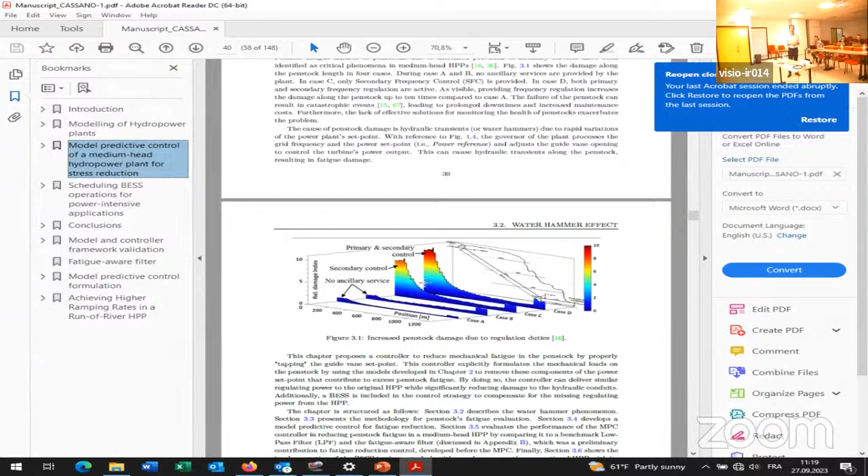That's why I think it would be a good contribution, my work, for the literature. Okay, thank you, this is all for my question. Thank you very much. Okay, thank you very much. So according to what we have discussed, I'm going to assign some time to myself and make you a few questions. I should say I have not many questions, because being one of the last members of the jury to intervene means that all the other members of the jury already asked the questions that I have on my list. Anyway, I still have one or two that I would like to ask you.

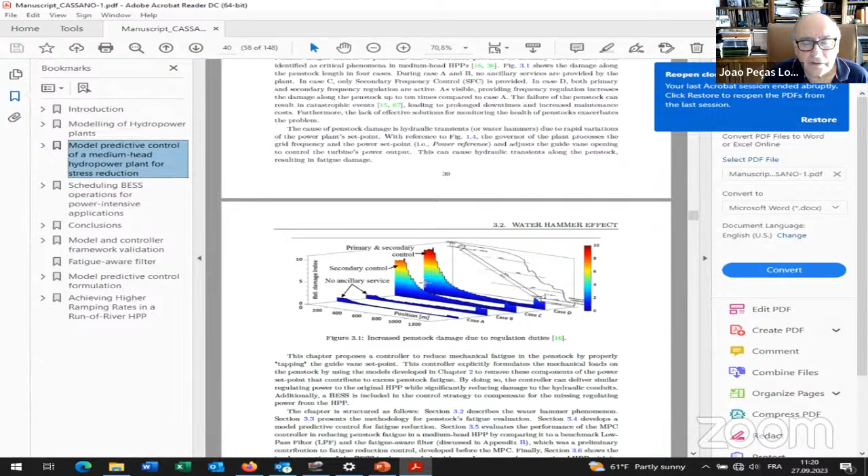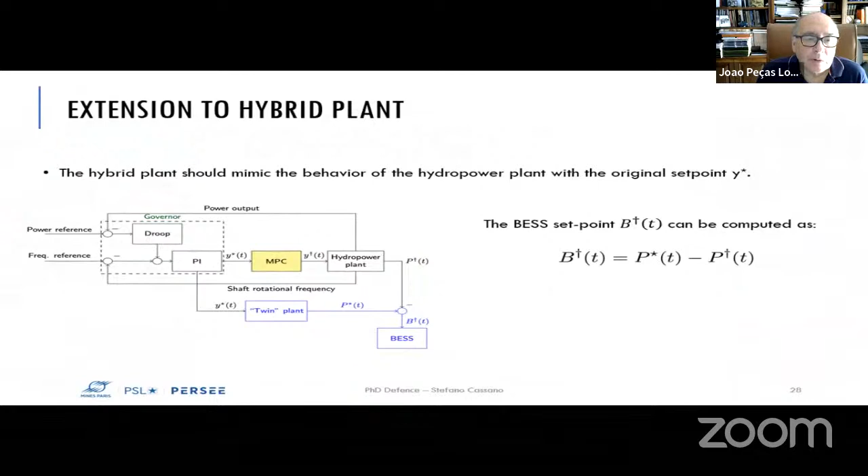So if you go to slide number 27 or 28, I suppose both can be used for the purpose of my question. Yeah, that one, that's okay. 28. Okay, so I understand the way you have formulated your problem, and mainly the fact that in your hybrid formulation you had interest in sharing the output of the governor in order to share it with the battery and the turbine of the hydro plant.

But I would like to ask you, okay, let's suppose that in the first stages of your research you don't have the battery there yet. Then you would have only the governor followed by the MPC block. And then my question is, in that case, would you consider also the possibility of replacing the governor by an MPC control approach alone? Have you thought about this?

We thought about another strategy actually, I think it was in the annex, another strategy to reduce the fatigue by replacing the governor. So basically it was based on a transfer function model of the plant, and we imposed the same condition as the MPC. The only difference is it was imposed in another way. In the MPC it was imposed as a linear formulation, etc. And so, I think that perhaps replacing the governor, because it's something that is installed in every plant, to replace it and implement another controller would be not easy, perhaps, and the operator would not agree. So I understand.